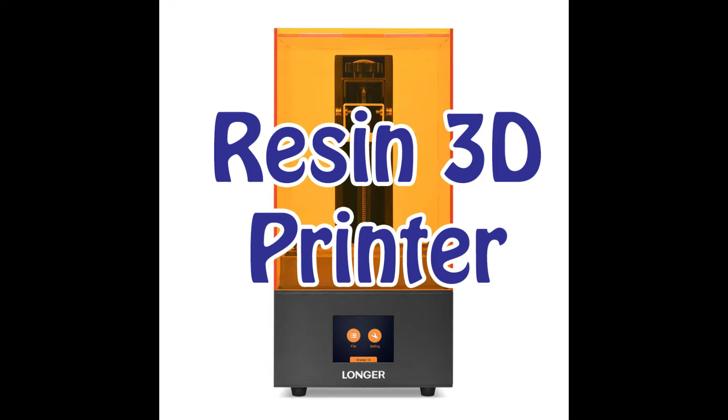this Orange 10 resin printer from Longer. It's the cheapest entry-level resin 3D printer I could find. I'll put a link down below. So let's give it a test run, see what it does from the menu and what you can print. We'll go over to software. Let's get to it.

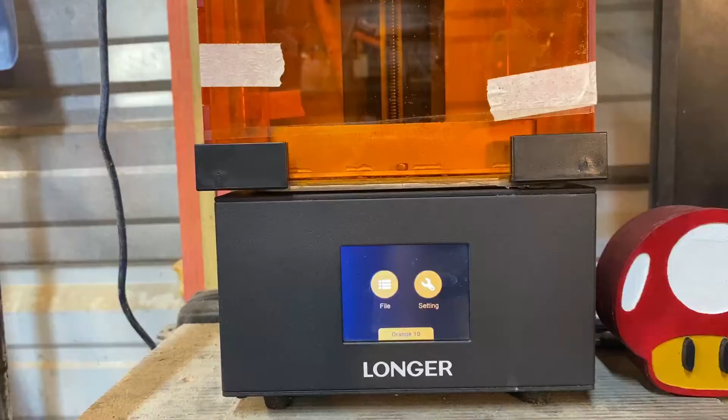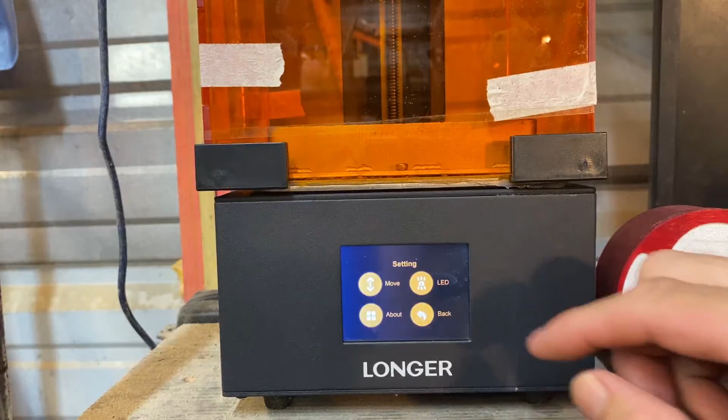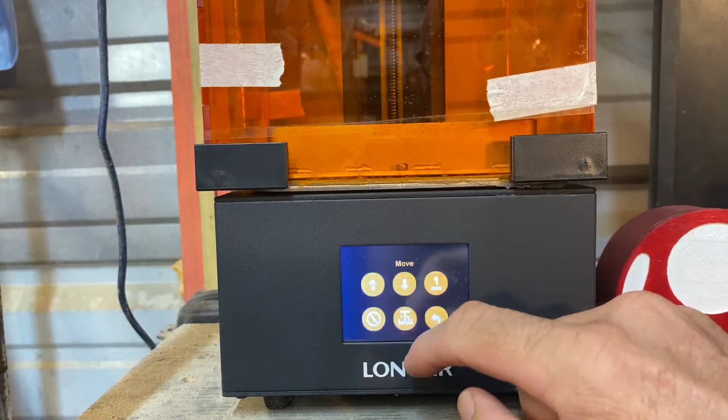All right, first things first, we'll go over to settings. Here you can move the bed up or down. You really can do not too much more other than some controls. Increment, level the bed, go back.

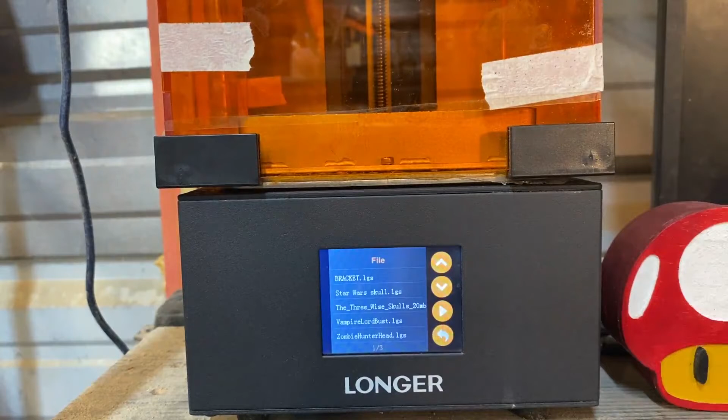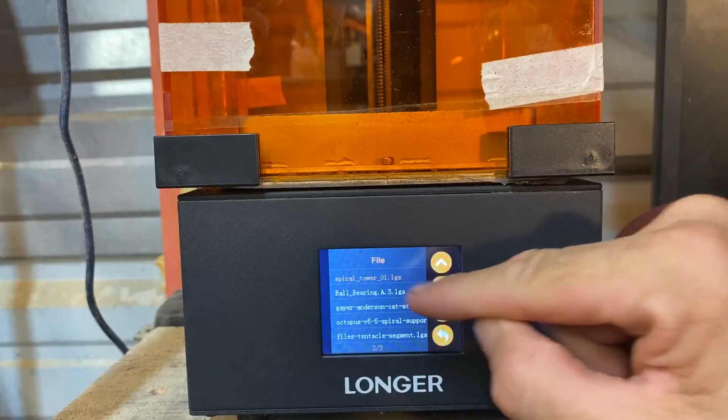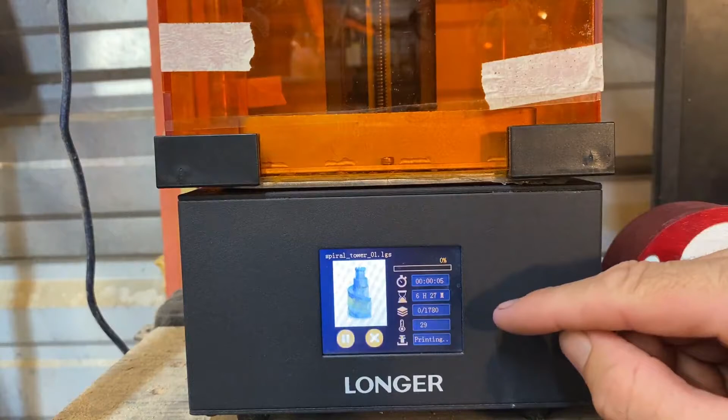Oops, sorry about that. And then the file menu, it's a little micro SD card. You can access all your files that you can select to print. Let's just say Spiral Tower and hit play. And it brings up a little picture of the model, and it tells you information about it. Let's cancel because I don't really want to print it.

It'll show you estimated print times. See, the bed's lowering now. I don't actually have any resin in it at the moment because I'm not going to print yet. But yeah, let's go over some of the software, the slicer software and stuff like that, and then I'll do some test prints, show you what they look like, because you can do really detailed small stuff with this.

Let's quickly talk about some of the software the Longer Orange comes with. First, it comes with some instructional videos that teach you how to set up and use the resin printer. Quite useful.

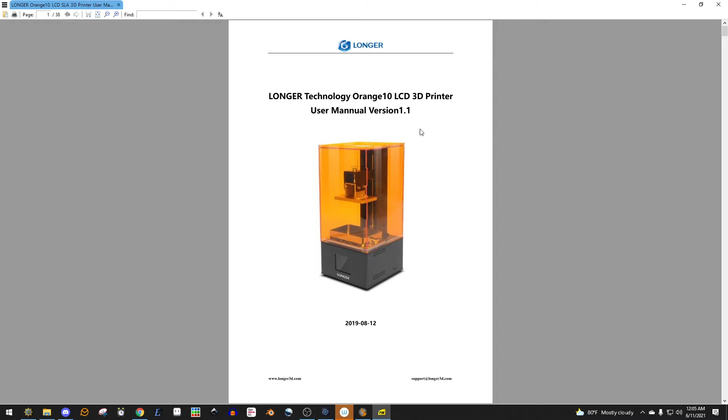Up next is a comprehensive user manual giving you all the details on what the printer comes with and how to use it.

It also comes with some STL files, which are 3D models you can import into the slicer software to create the files the printer uses to create a file the machine can use.

Lastly, it comes with the slicer software. Get it? Orange slicer soft. Excuse me, I'll see myself out. But seriously, this is the main piece of software that helps you go from 3D model to printable file by the machine. Let's fire up the slicer.

This is the slicer program it comes with. It takes STL files and turns them into printable objects. You can move the view around by clicking and dragging with the mouse.

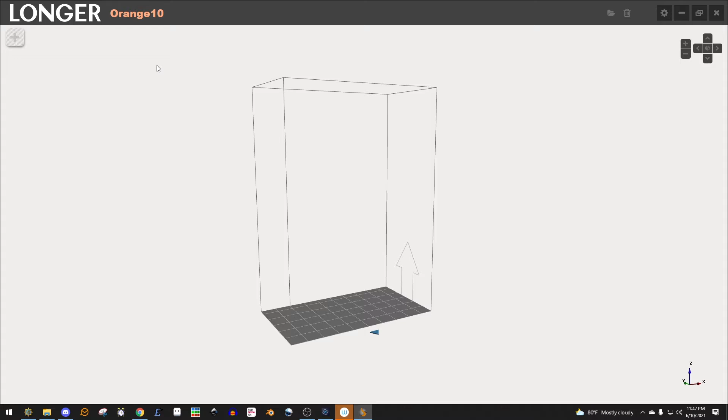Let's open up an STL file. It says the object is too big. Not a problem. Click it and hit maximize to auto fit it.

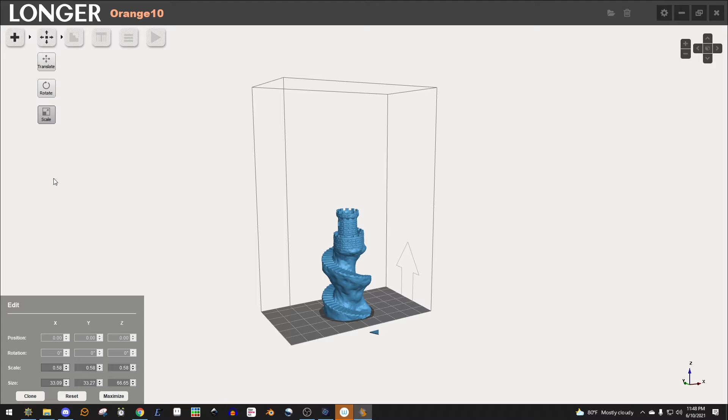You can also manually scale it with the options on the top left. You can also rotate and translate the object too. You can duplicate the object with the clone button. Let's reset and move on.

The next tab tells us if the object has any error and will fix it for you. The Support Generator tab is next. This will add the necessary supports for a successful print of a 3D object. There are plenty of options to play around with. Let's use the defaults for now.

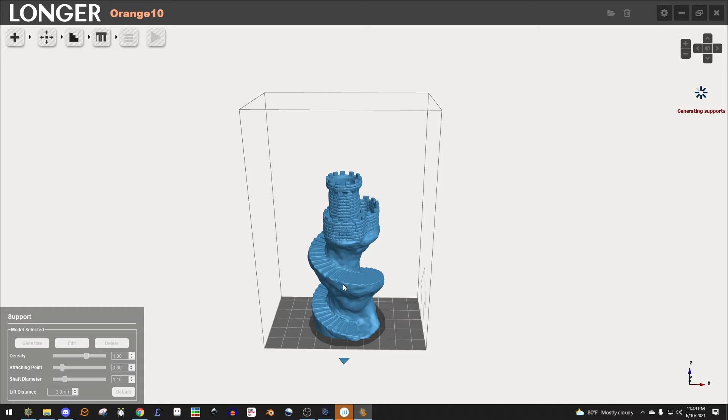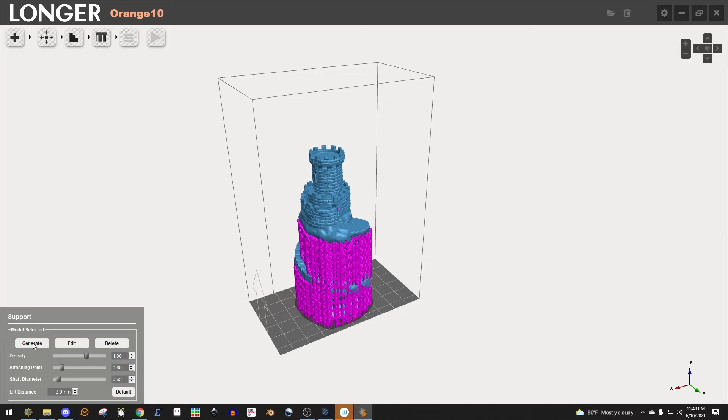It can take some time. There we go, you can see the supports in purple. Let's do it again with, say, thinner shafts on the supports so they are easier to break off. Make the changes and hit generate. And wait. There we go. As you can see, this model has a ton of supports, which can be a real pain to clean up after the print is done.

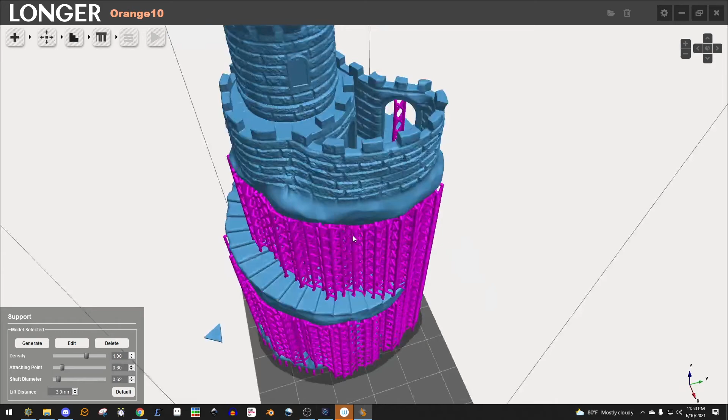The next tab is the Slicing tab. It will generate the layer by layer pictures that the resin printer will use to print the object. Once it's sliced, you can scroll through the layers and see what each one looks like. Pretty neat if you ask me.

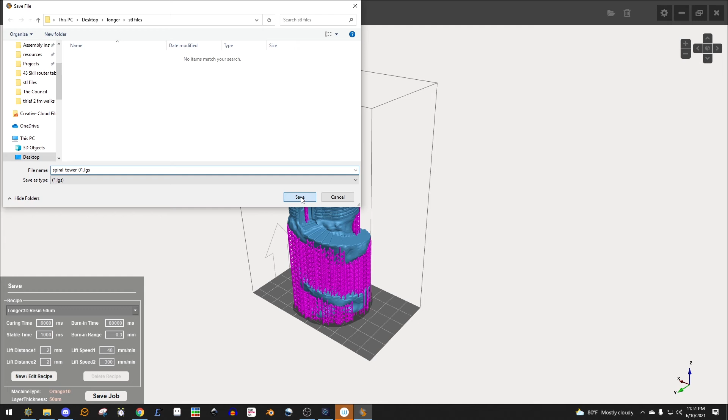The last tab is where you save out the file to an instruction set for the printer so it can read and print it. Just select your printer and hit the Save Job button. Creating the file where you want, you will have to copy it to the micro SD card and move it to the printer to print. And there we have it, the slicer program.

Alrighty, it's been some time and here are a few of the prints I've done with the printer. Here's an Egyptian cat I downloaded from a museum site. I'll have links to all my favorite free model sites below. A couple of Dragon Quest figures. The dragon I printed in gray resin. I'm amazed at the fine detail you can get with a resin printer.

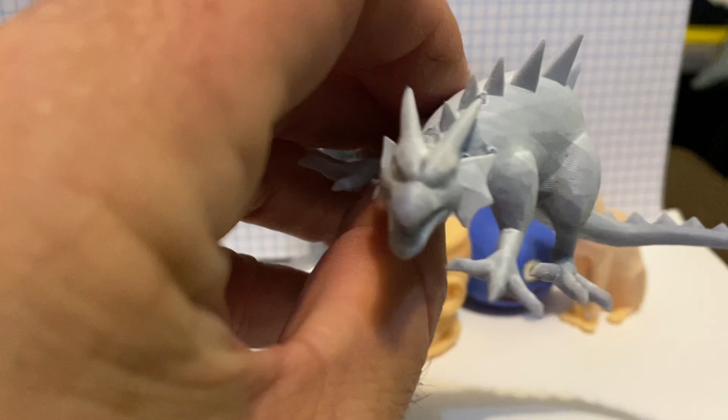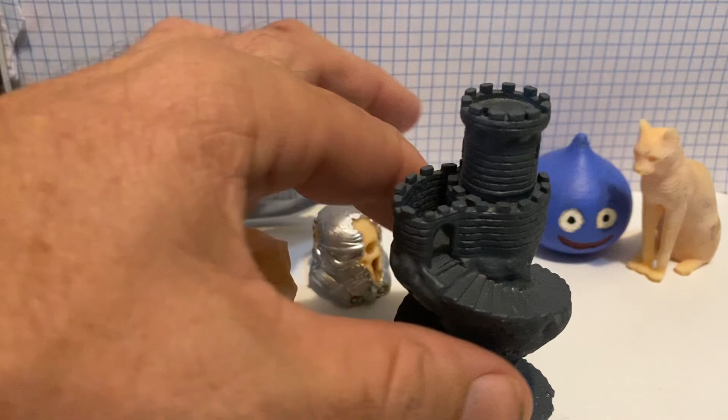The Stormtrooper head I am painting with metallic paint. And here is the spiral staircase. Super fine detail on this. Every brick and step is crystal clear. I'm loving it so far.

Oh, and you can choose to print hollow objects like Cigar Guy here, which will save you on resin. Or like the Stormtrooper guy, you can print solid objects. And there you have it.